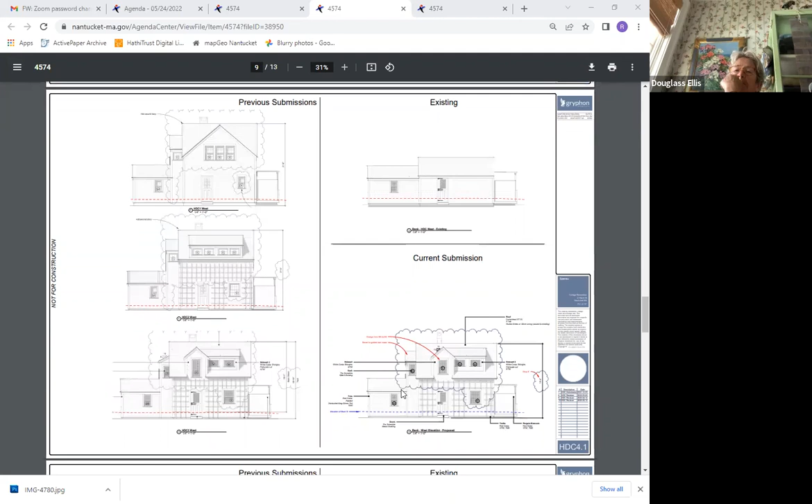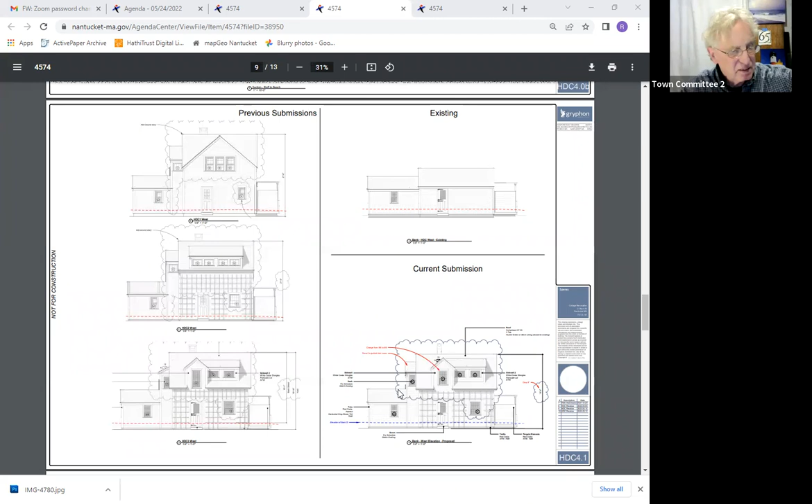Thank you. Ethan Griffin on behalf of the applicant. I do apologize, I think I missed the last hearing, but I was able to review the comments on YouTube, so that was helpful. We've been able to reduce the height further, I think we're down to 19.4. HDC requested that we take 6 inches out of it, which we were able to do, and also reduce the glazing on the rear. So what you're looking at is the Bank Street elevation. They liked some of the quirkiness that was part of this presentation, but they thought the rear was really just too busy and wanted us to simplify that considerably, which we have done.

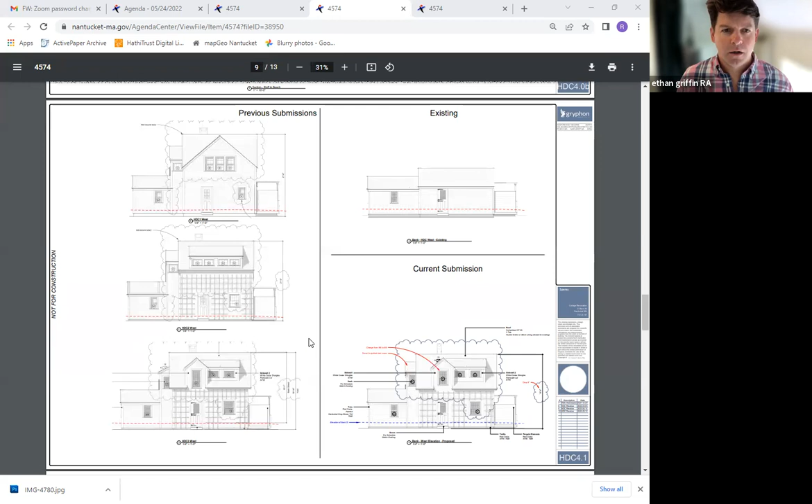They also had some comments about how we're handling the little bump out that contains the stair, and they wanted us to go back to an earlier version, which is on the north elevation. And so that basically is the changes. Most substantially, again, squeezing that 6 inches out and simplifying the fenestration were the major changes. Thank you. Thanks, Ethan.

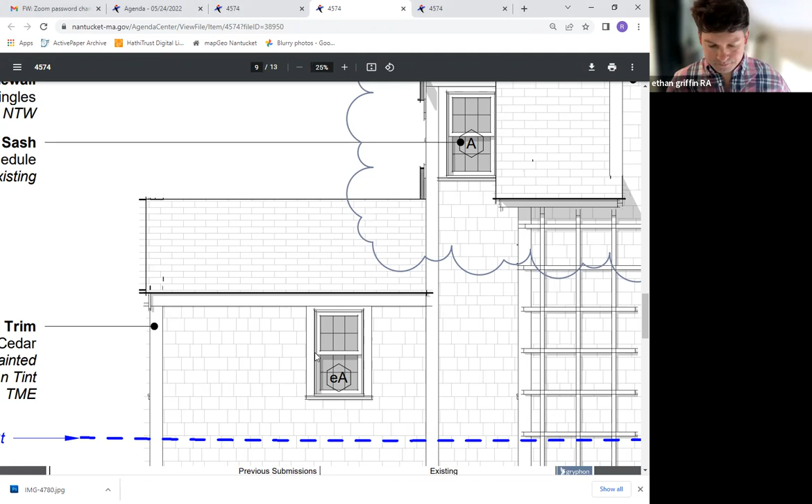Let me just scroll down here and go through some of the changes. Oh, and they wanted us to change the chimney as well to incorporate sort of an owl, that terracotta owl detail in the corbelling. So that's also been updated.

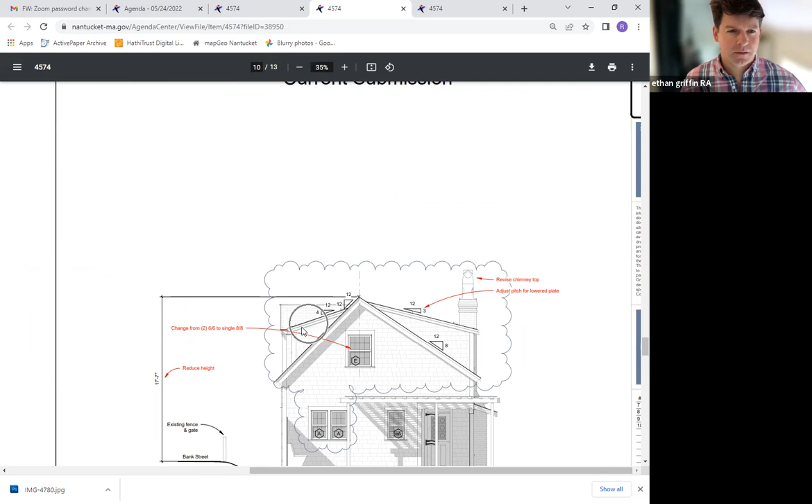The facade we're looking at is east facing, is that correct? That's east facing, correct. That's the interior of the lot. Certainly, there is that pretty substantial mature hedge that goes around the property, but certainly anything, the eave height above is certainly going to be visible.

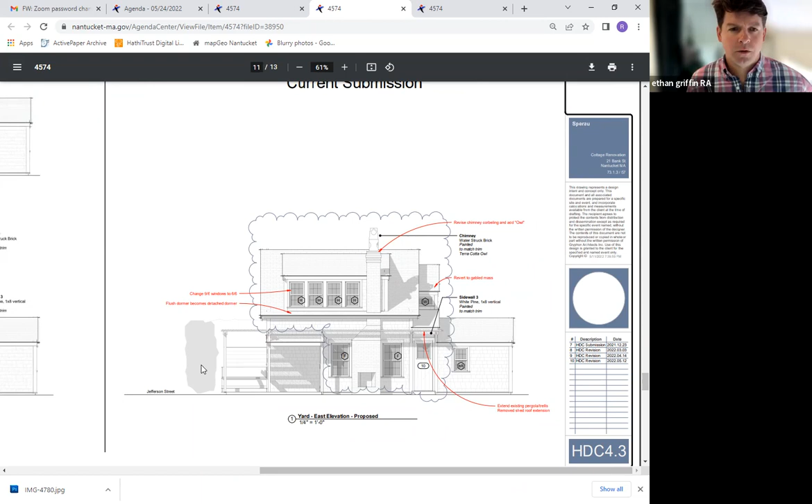Can I just ask, I guess this means we have lost the battle, that this will not become a 2-story house? Well, Ethan, you know how many times you've gone back to do this, 3 or 4 at this point. Correct, yeah, this is the 4th submission.

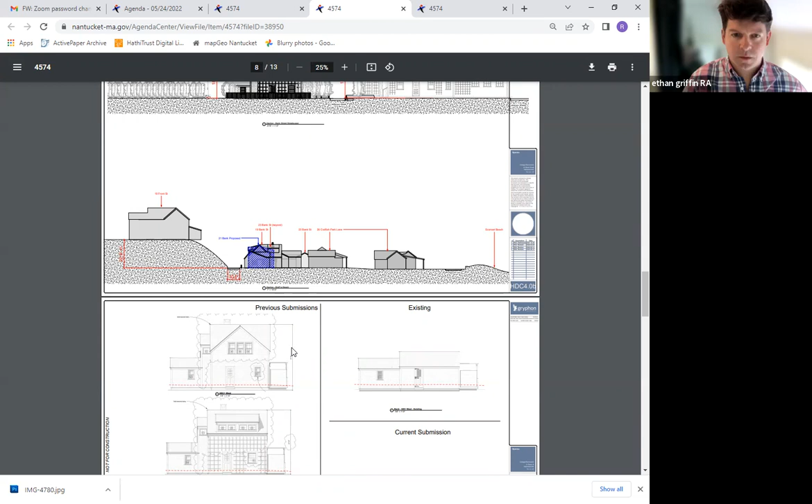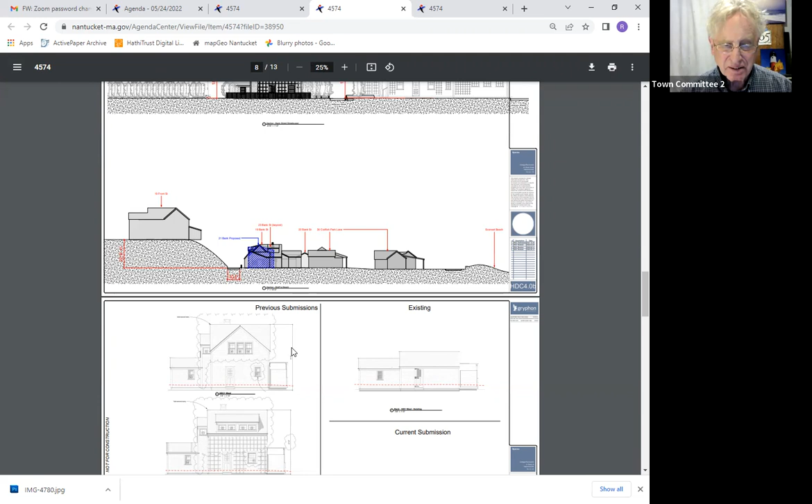It looks like he's addressed the things that the HDC had most in mind. I know there's the overall business of putting second stories, I think that ship has sailed, but anyway, that's all I have to say.

Yeah, there are 2 stories on either side of this house, but, and someone told me, and maybe Rob, you know the answer to this, that 2 stories are not allowed on Codfish Park Road anymore. There are certainly some 2-story houses on Codfish Park Road, but I'm told that if you're on Codfish Park Road, you cannot go to a second story now, that's the rule. I don't know who's making these rules or who said that, but it'd be nice to say no 2-story houses in Codfish Park ever again. I don't know either, we didn't get that memo.

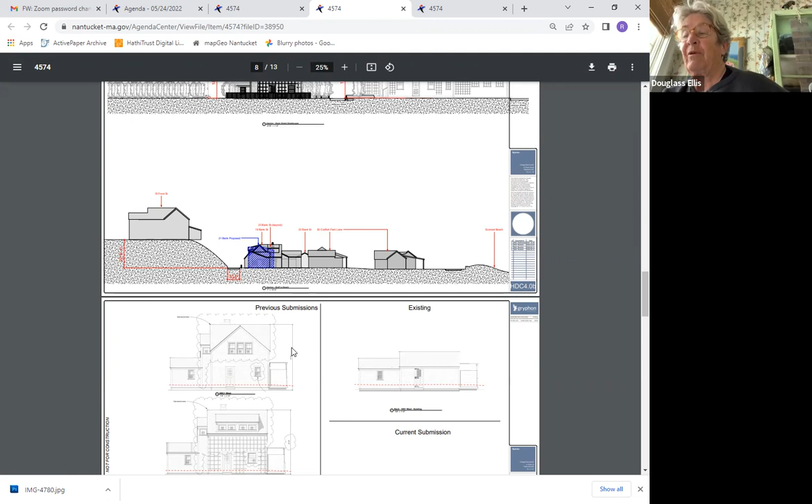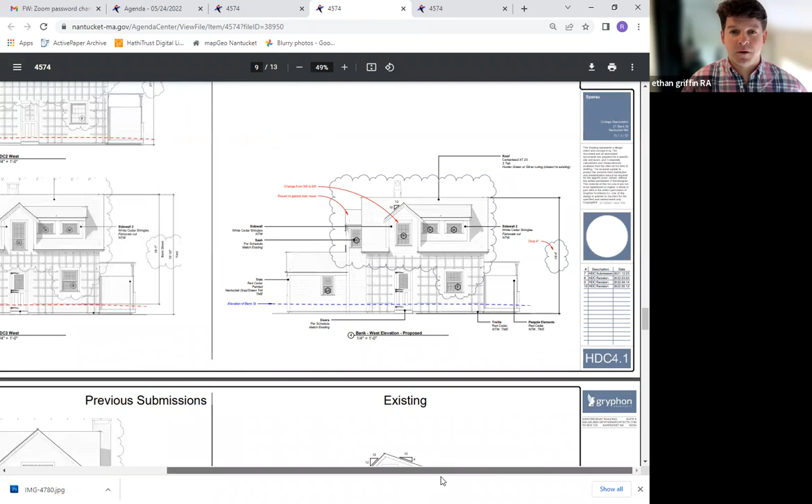I appreciate the height change, though. Oh, absolutely, I think it's wonderful, more cottage-like. And it's definitely quirky, which we like. I like the quirkiness too. I'd love to see the glass in that Dutch door saved, it's so great, that bullseye glass. Yeah, it's lovely, the goal is to reuse those. There's actually 2 Dutch doors of that same type with the sort of bullseye glass in it, which we'll be keeping. Great, nice reference.

I guess at this point, that's about all we can say. And Ethan, we appreciate you coming and also your patience, and also it's definitely quirk with a capital Q. We like it for that, it'll fit right in. Great, okay, any other comments?

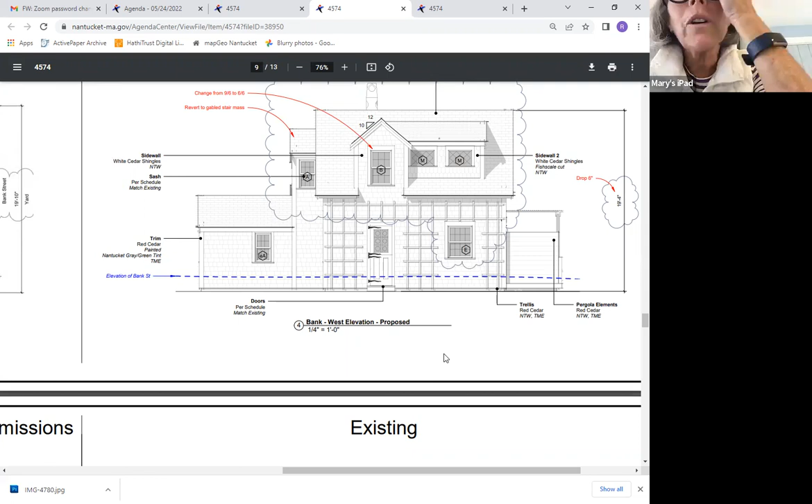No, sir. Okay, well, good luck with the submerged house, that thing is so far below the street. It's amazing. It's only 19 feet off Bank Street, so it's a pretty diminutive structure, even though there is a 2nd floor, but we're working to make it fit. So I appreciate all your comments. Well, you're not contemplating a basement, I hope.

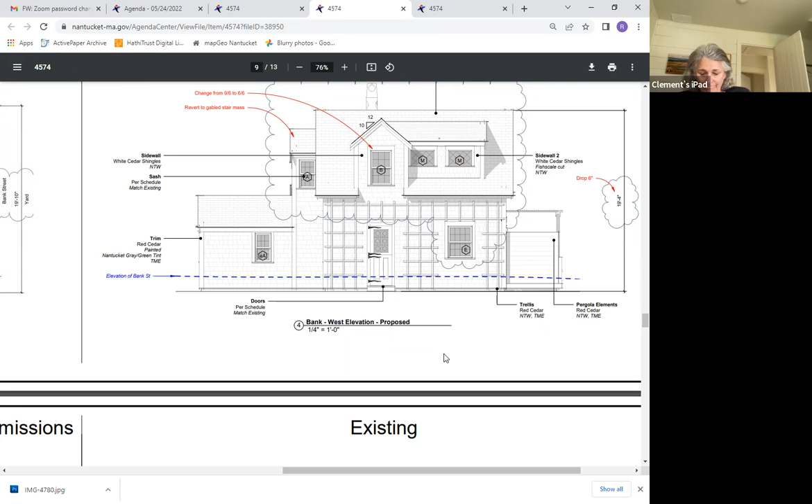Not on my watch. I don't know. That seems like a serious endeavor. Yeah, you'd hit seawater. That doesn't stop them though, Rob. I know that's true. Thank you. Ethan, thank you so much. Great, everybody, thank you very much.

All right, so we'll go back to item number 1.

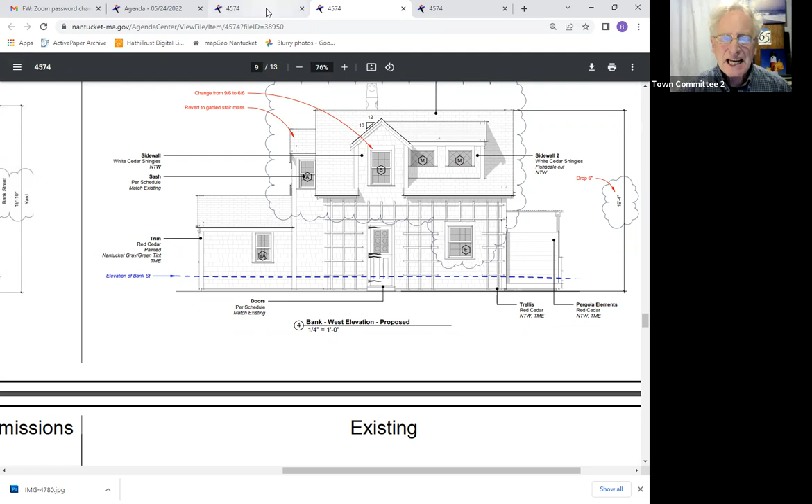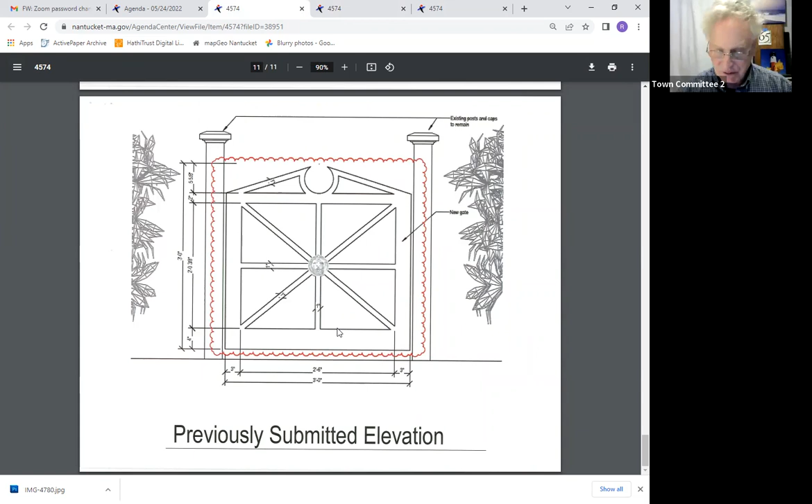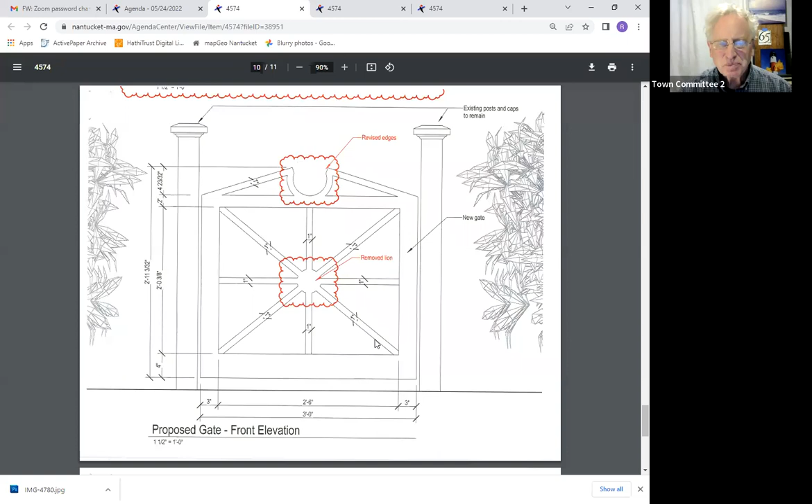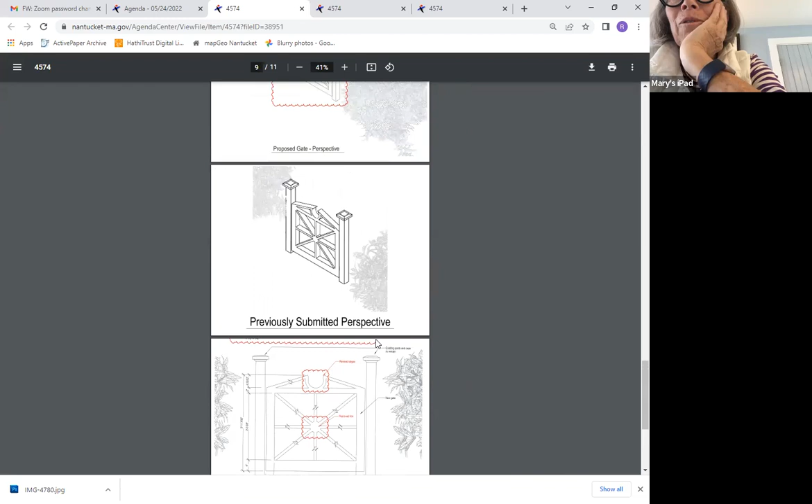The gate. How did that happen? There we go, there it is. I don't think I was here for this one. You were, yes. You were on the road, taking my dog to Virginia. I missed that one too. That's right, it looks like it would be appropriate in Virginia, this gate, but none of the others on the street have that top piece. It's so fancy, it's a broken pediment.

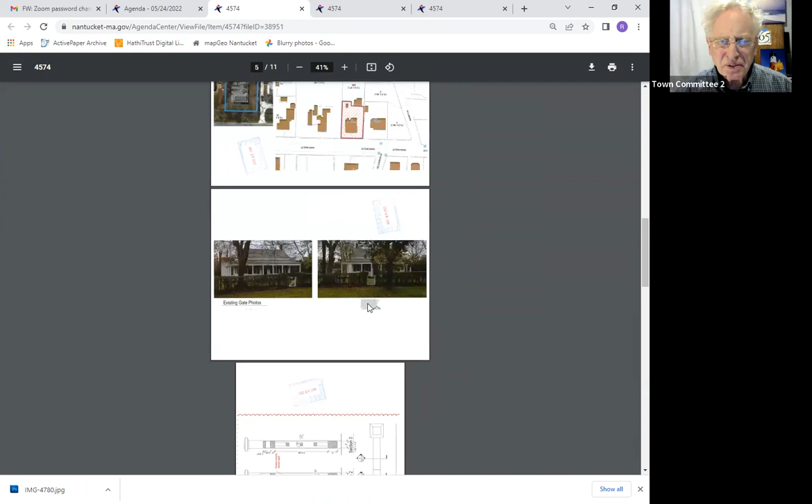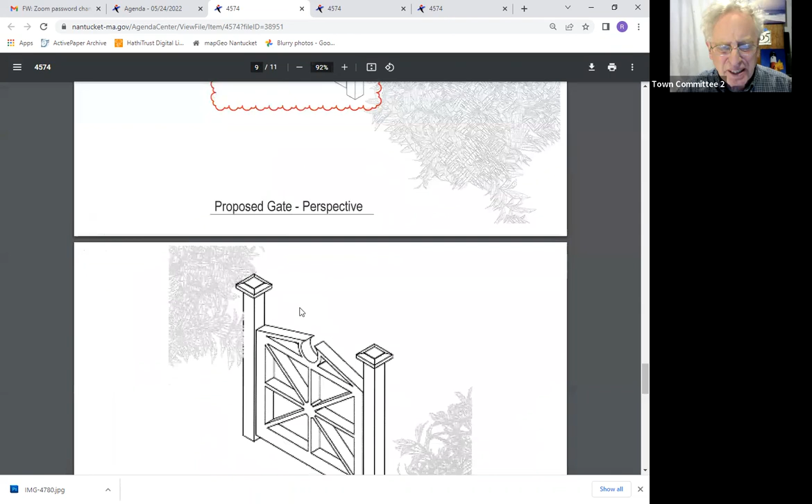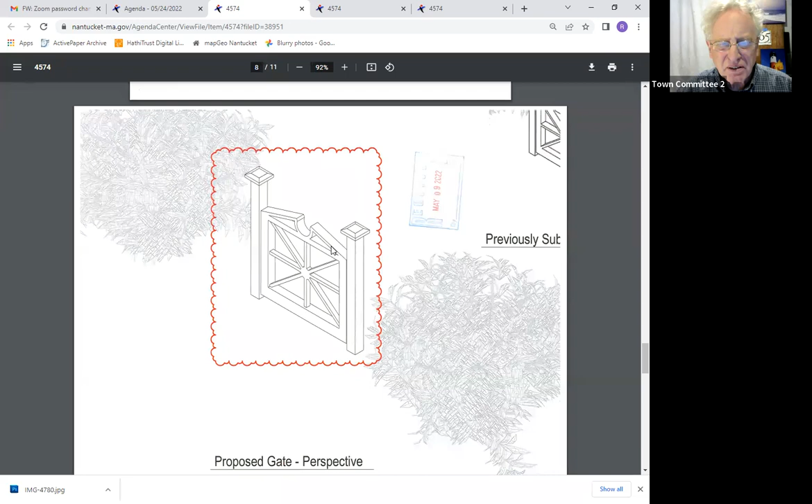Where's the current submission? Here is the current one. Okay, proposed perspective, I thought that's what we said, make it simpler. Yes, we did. The HDC comments were, they were split on the lion, and they didn't like the pointedness of it. Erase the broken pediment, get rid of the whole pedestal thing. The changes I see is that they took the pointy things off before they broke off, and they got rid of the lion.

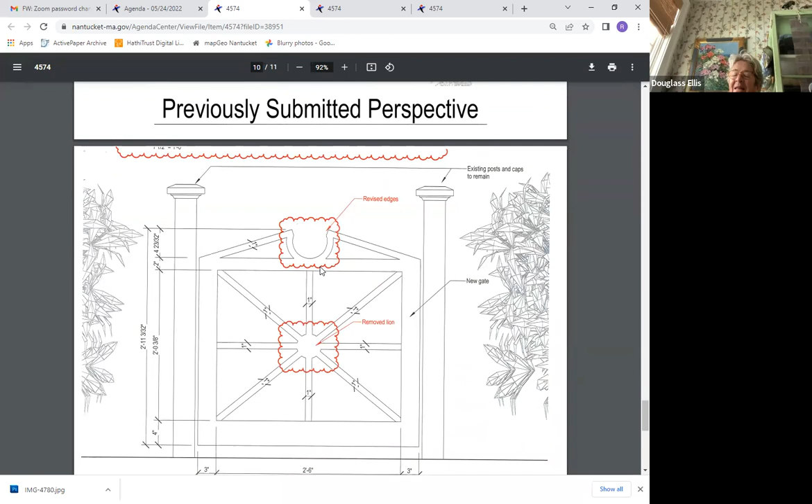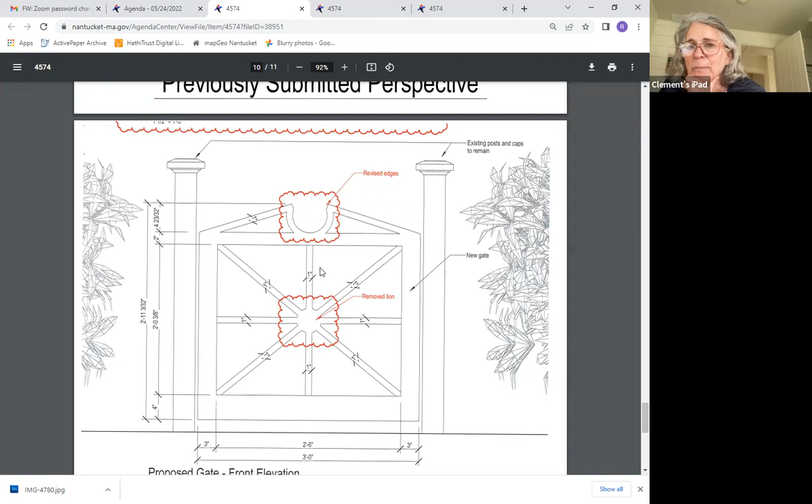But they could still keep that detail. I don't like the split thing. All the gates on Main Street just don't have any detail on the top, and they're all lovely looking. This seems too grandiose for Sconset Street.

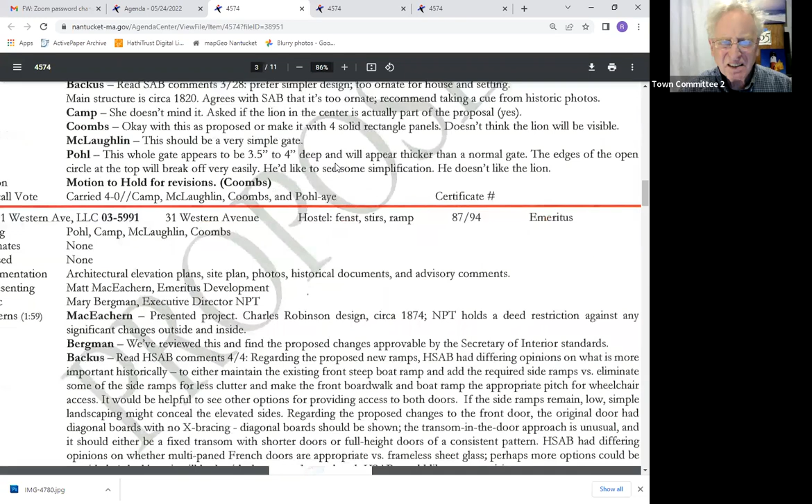I agree, oh, you mean they just took off the pointy pieces but left the pedestal? Why not just get rid of the top part if you want all those spokes? That was the thought, that you could just take the top part off. Let me go back into the comments - a rectangular gate. The gate appears to be 3.5, 4 feet deep, 4 inches deep, will appear thicker than a normal gate, and the edges of the top circle will break off very easily. So they asked for revisions and they took the points off and got rid of the lion.

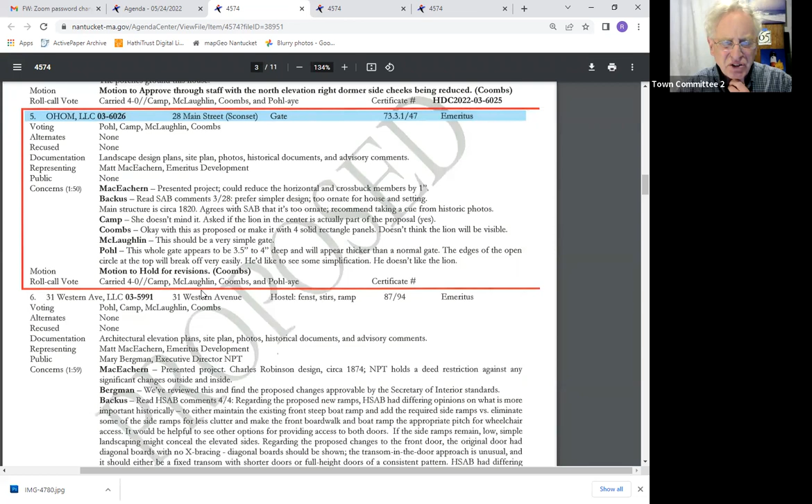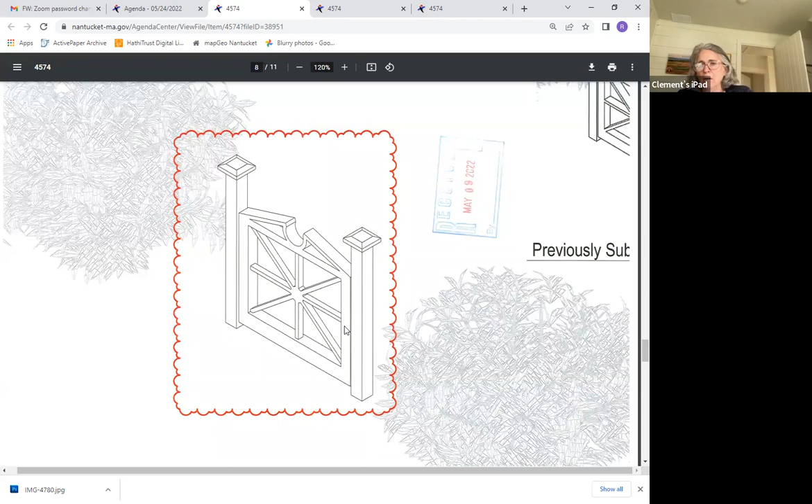So it's still kind of, we think it's still rather ornate, do we not? Yes, it's ornate, it's thick, and it doesn't relate to anything. It's not reminiscent of any other architectural embellishment in the vicinity. I think the one comment was just make it a rectangular gate, take the top off, and make it a rectangular gate. If you want those cross bars, that's fine.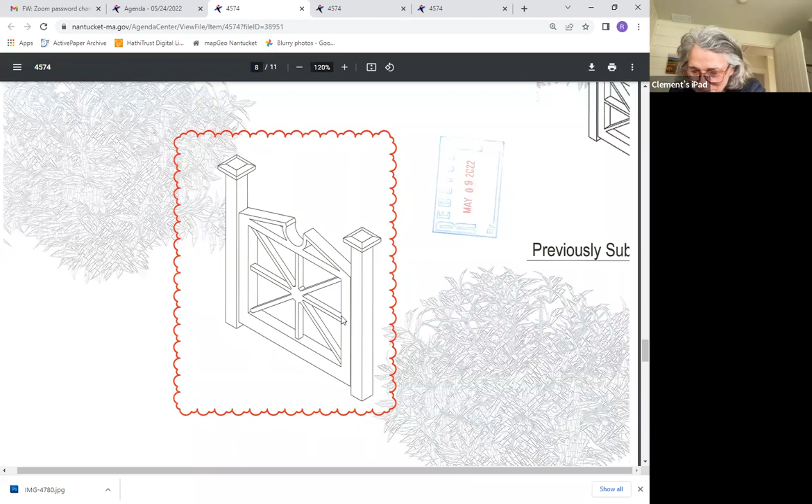I agree with you. Okay, do we call that a crossbuck? I believe so, the top crossbuck. I call it a broken pediment. Well, that's when it's on the Parthenon or something, the star part in the middle here. Yeah, that's okay, that's reminiscent of some places. That's fine, it's just the top - it looks like somebody stuck the level on top of the gate and left it there.

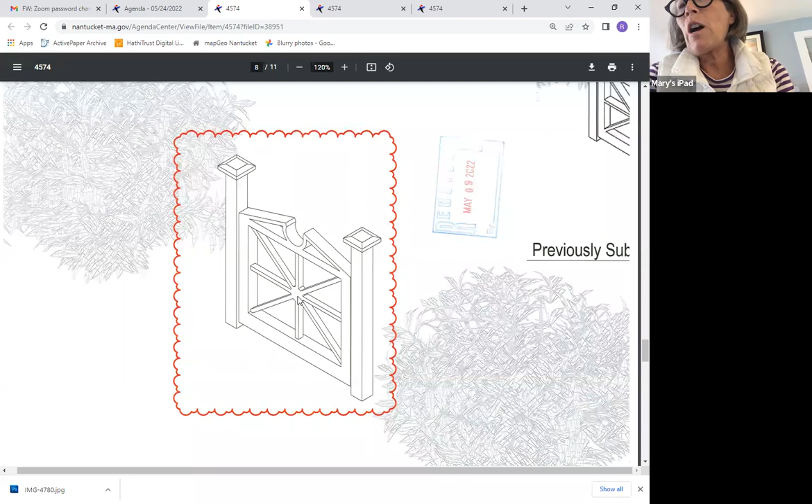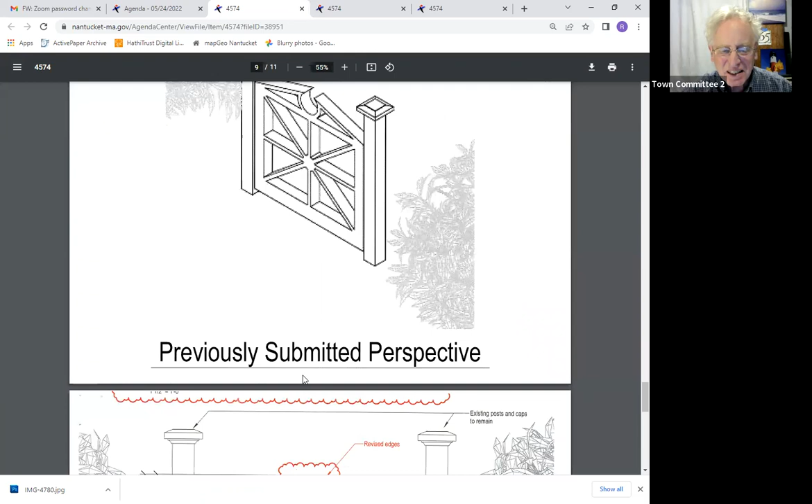The devil is in the details. So we would just prefer it even simpler without the top piece - a rectangle is nice.

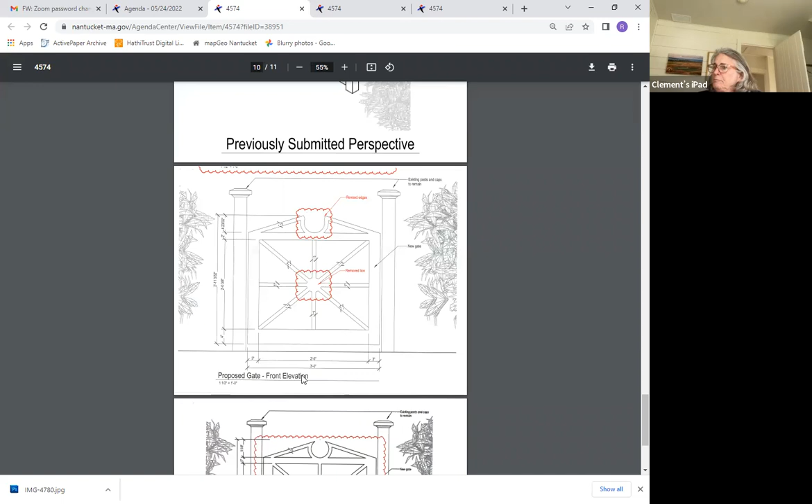There are only 4 of us here, so there's nobody for the applicant, so we'll move on to item number 3.

12 Codfish Park Road. Fenestration change. There's a lot of clicking. Okay, here we are. This is, just for the record, Stephen Cullen Trust for 12 Codfish Park Road, and it's a redesign on some dormers and fenestration.

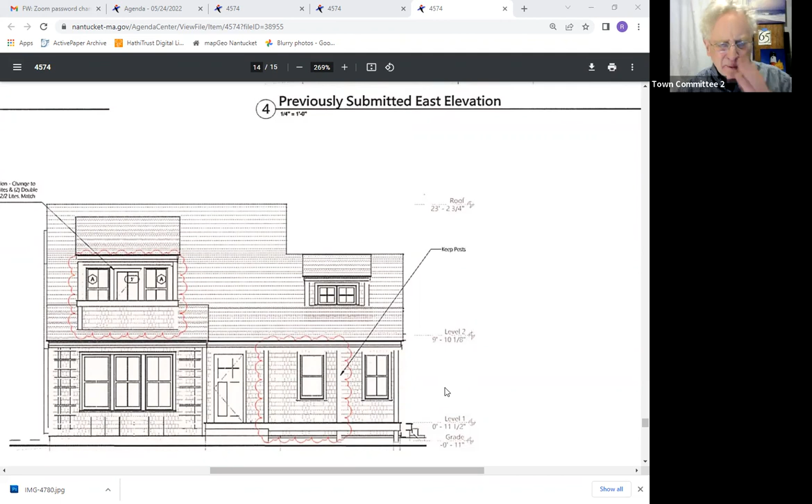And they went back and they put the posts back - do you all remember that they had taken the posts out? Yes, they'd taken the porch out, hadn't they? Now we have porch again. It's hard to tell on the perspective, but yes, I would assume we have porch still.

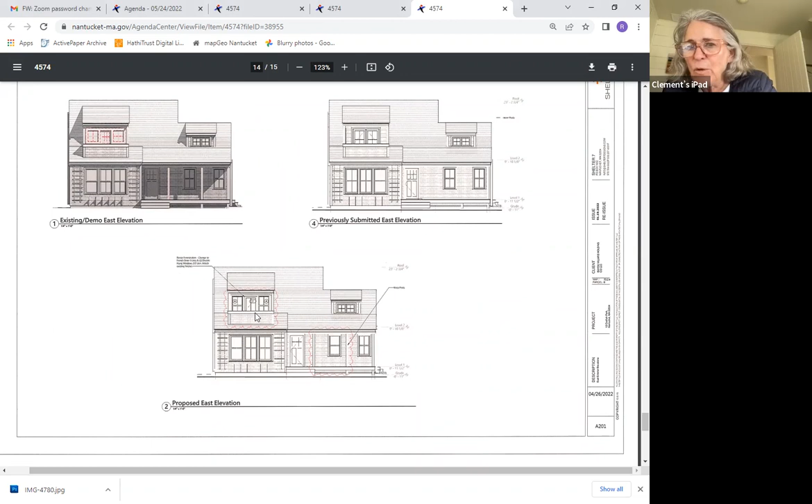And they've still got a door on the second story, which of course we don't like. Right, but they've added the second floor balcony. I mean, no, I think that was there. I think if we saw existing, that's a second floor balcony and windows to get to it. And then they did the French doors, and now the third one is 2 windows and a door.

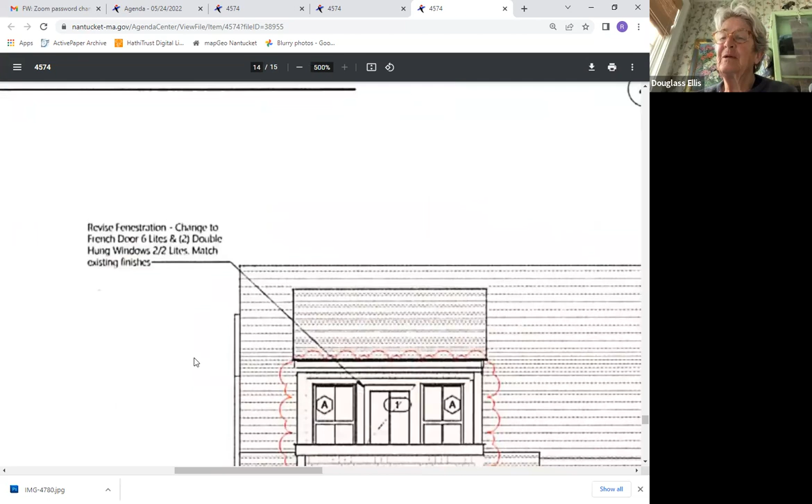I have to go, may I be excused? Yes, yes, you may. Do you still have quorum, et cetera? Yes, we do. Okay, I'm very sorry, that's fine. Take care, thank you.

I just have a question on the windows and stuff that they're showing us. Sometimes they leave out the cross pieces - do you notice? It's like a Where's Waldo game.

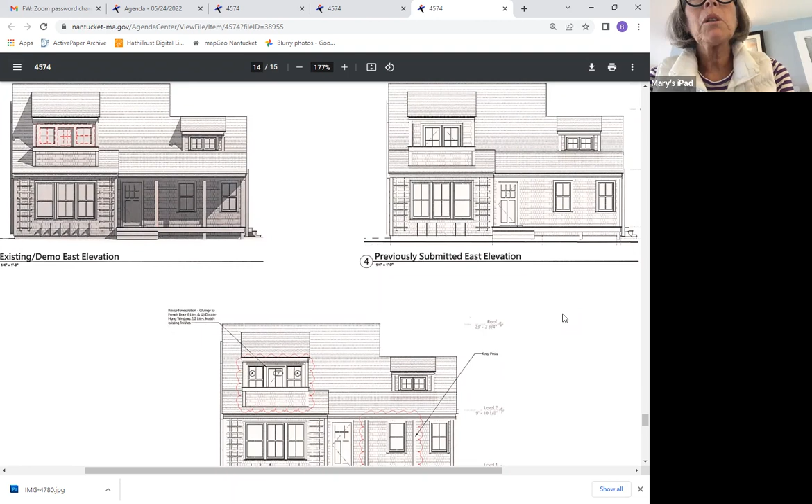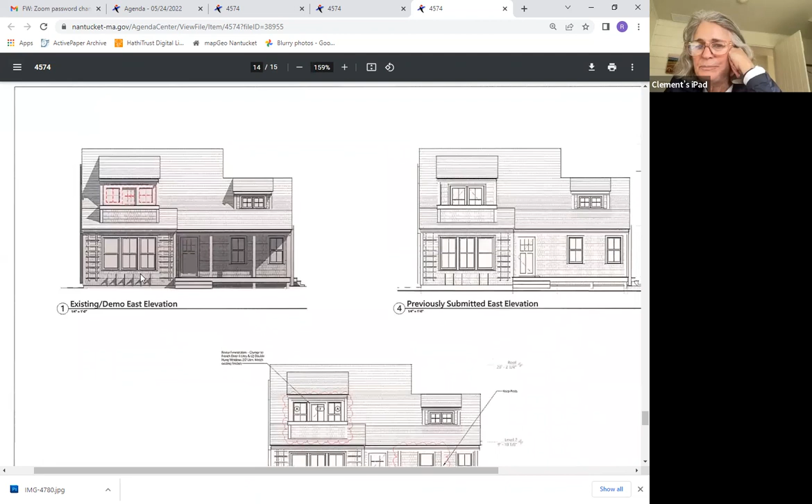I guess, but for example, what do we think the French door on the second floor is going to be? Is it going to be glass, two panels, or four panels? Let me scroll down and see if there's a schedule.

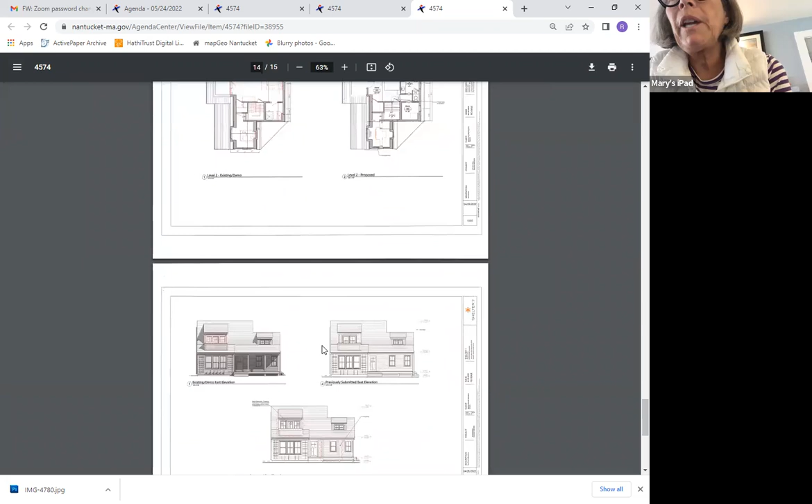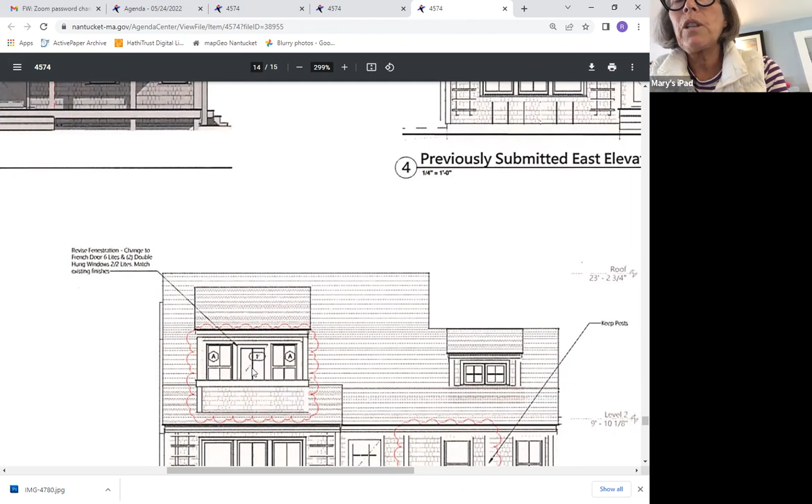No, there's no windows schedule. Right, well, I think it's an incomplete application then. It makes me nervous that they are going to be changing something out. I definitely don't like the single door, the single second story door without muntins. You have muntins in the other windows, I want to see it in the door. So if they haven't provided that information, I think it's incomplete.

Oh, here it is. Well, it says change to French door with 6 lites. Okay, well, they need to show the 6 lites then. Right, okay, good.

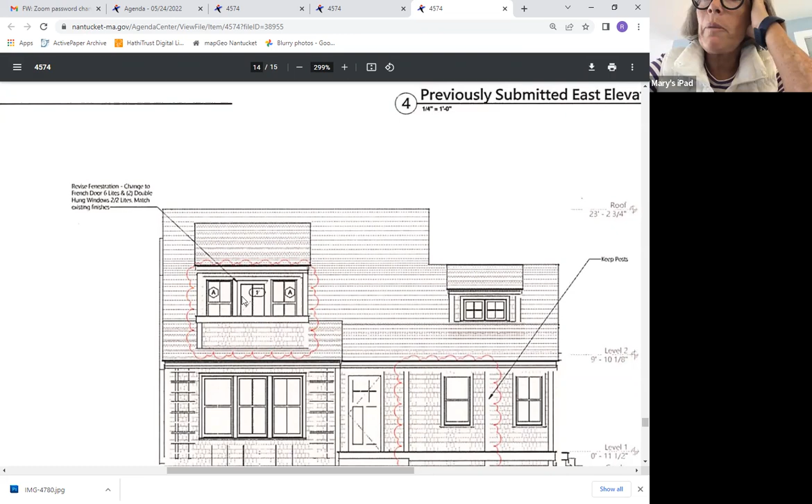And similarly, on the front porch, now that we're back to a front porch, right Rob? And we've seen the side elevations to ensure that we are back to a front porch, I hope. Yeah, hang on one sec, I just want to make sure that those 2 windows are identical.

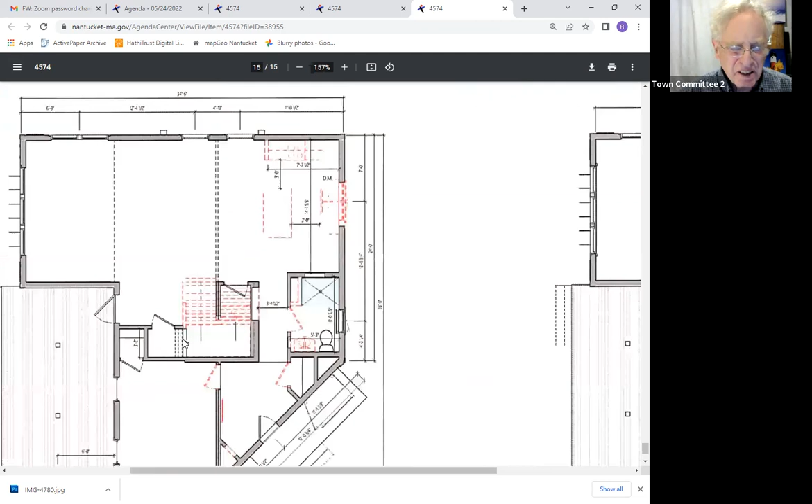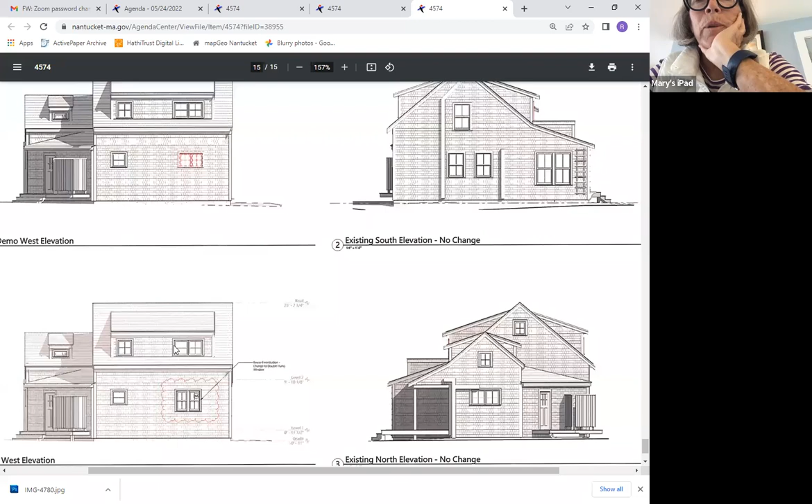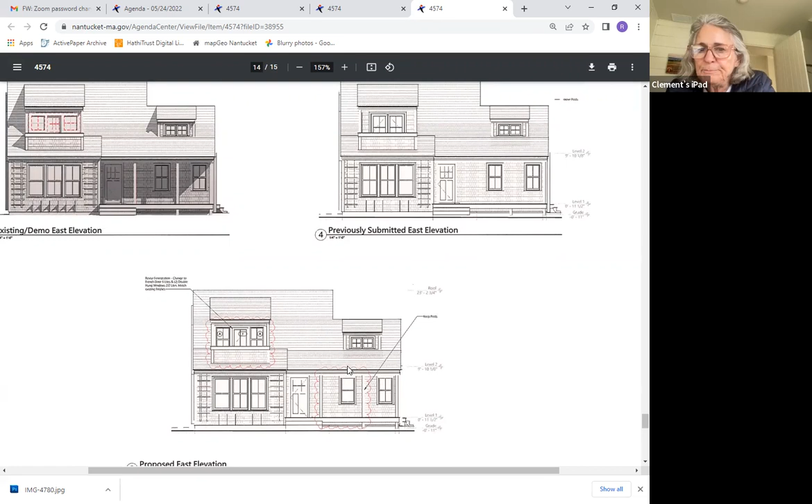Okay, well, I think that we will certainly note that we need a clarification on the type of door that is on the east elevation, and to draw the windows right, just so that we know they're the same, that they're the 2 over 2s and not 1 over 1. Not taking stuff for granted anymore.

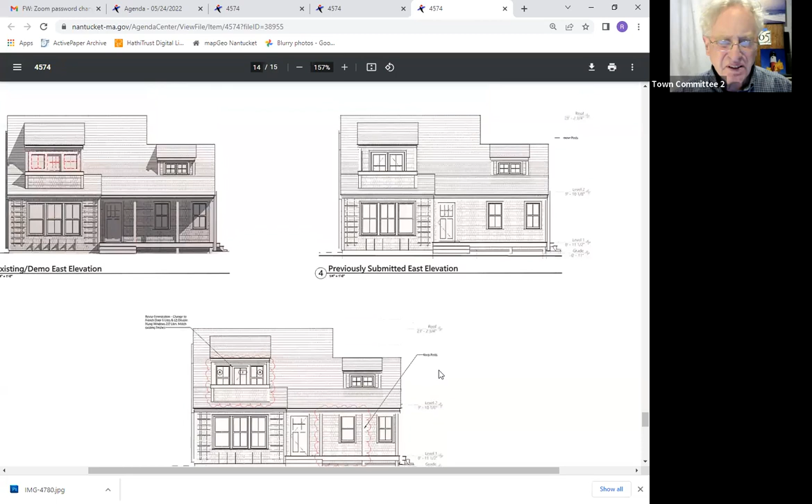I do appreciate that they've stayed with the porch on the first floor. Yeah, it would look funny without those posts, and I don't know how structurally you'd get away with it anyway. Well, they were going to enclose the room, pulling it out, pushing the room out. Okay, I'll take your word for it.

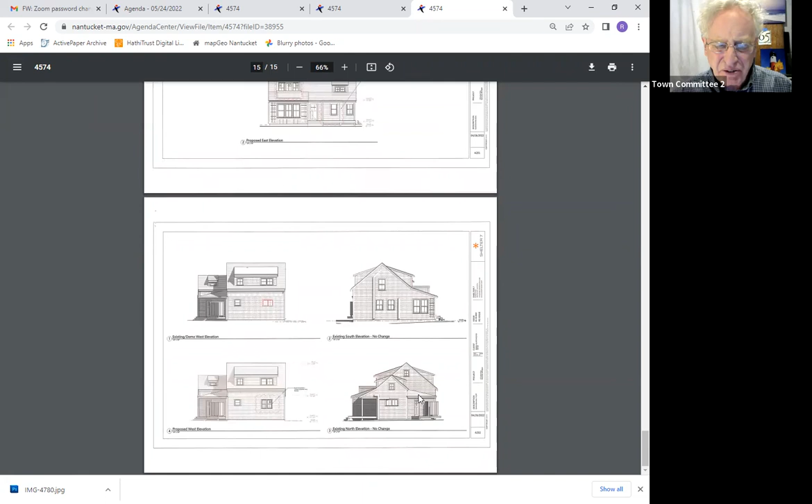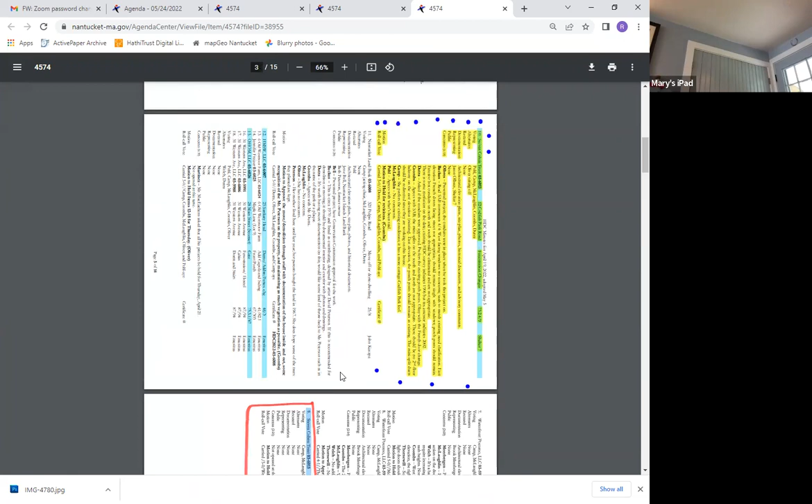Okay, any other comments on this application? I did note that they noted the mini split ducts that were existing when... so that was an unapproved installation initially also. This is fun.

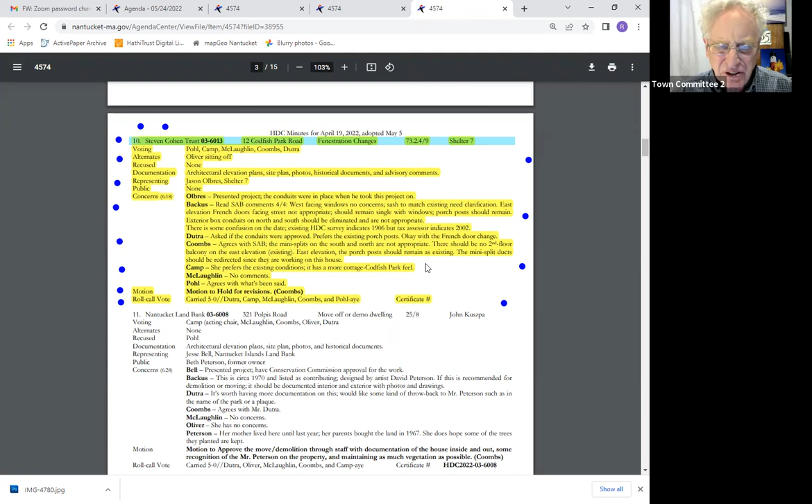Sash to match existing needs clarification. Well, we said that the first time. Asked if the conduits were approved, prefers mini splits on the south and north are not appropriate, but I think they put those in without any application. Oh, that's right, Diane said the mini split ducts should be redirected since they're working on this house. We'll see what happens with that.

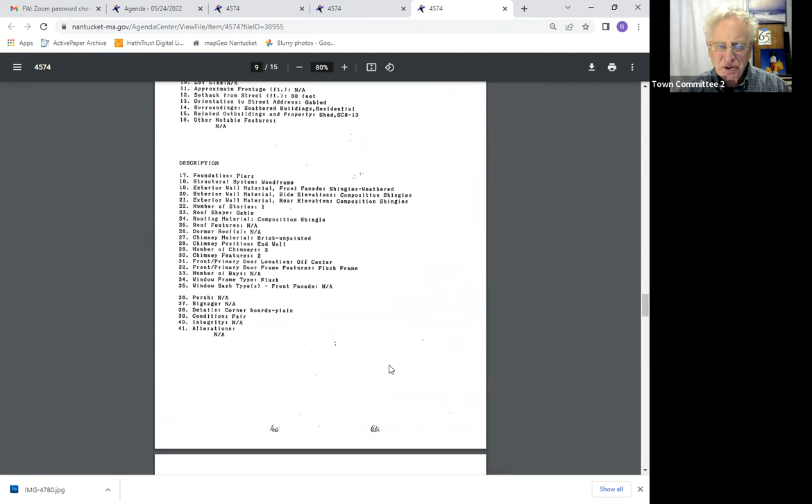Okay, any other, anything else on this application? Anybody? Oh, there's what used to be there. One story. Yeah, I think that one had yellow trim, as I recall. That was a while ago.

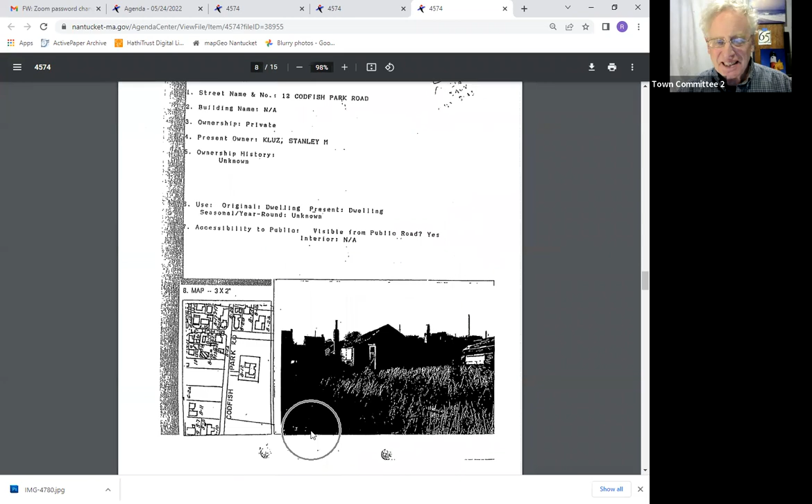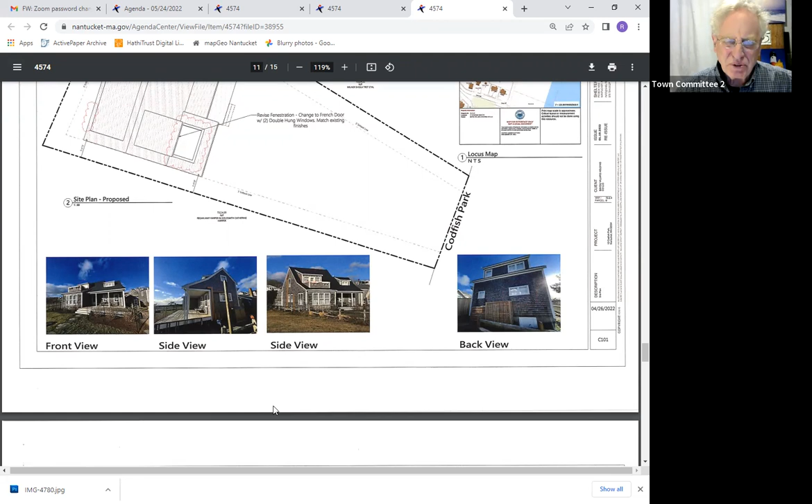Yikes, there we go. Was this the first house that sort of joined the cleaning up of the neighborhood? Sort of started changing the neighborhood? I think it's more recent than that. No, actually, that one's been there for quite a while. But yes, you're absolutely right. I mean, it's not a bad one.

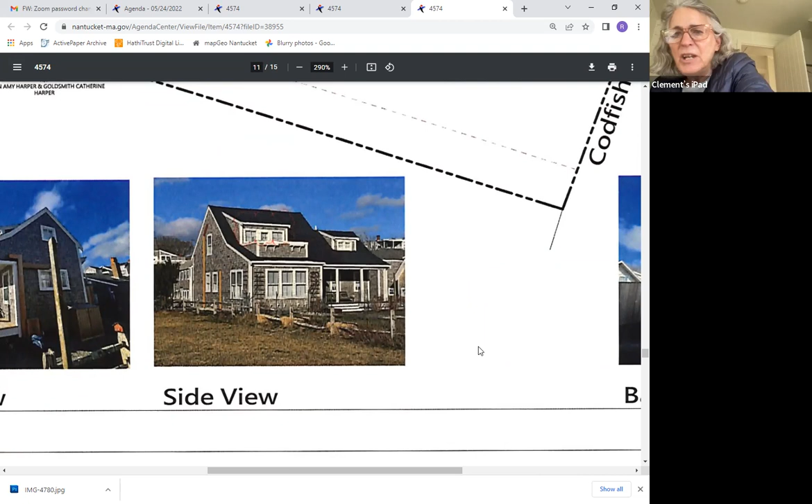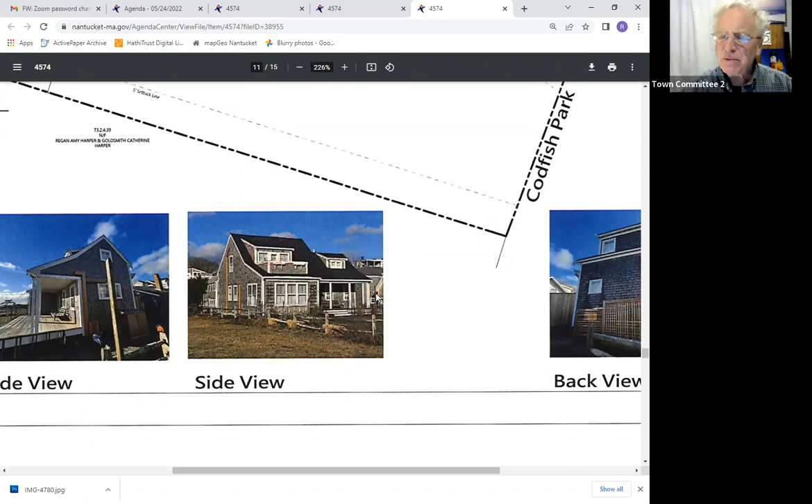Really, it's perfectly fine, it's just it started a domino effect. They also, I just noticed this morning, they built a shed, a pretty big shed, right in kind of their front yard to the right of the porch a little bit. It's not in that picture, but it's a brand new shed. Yeah, we approved that. We saw that early on. Yeah, I don't remember it, but we did see that.

All righty, all right then. Geez, that's it, right? Yeah, we don't have any other items to discuss that I see. And so let me just make a motion to approve what we've commented on so far. I'll second that. Okay, thank you. All those in favor of approving our comment? Aye. All right, the ayes have it.